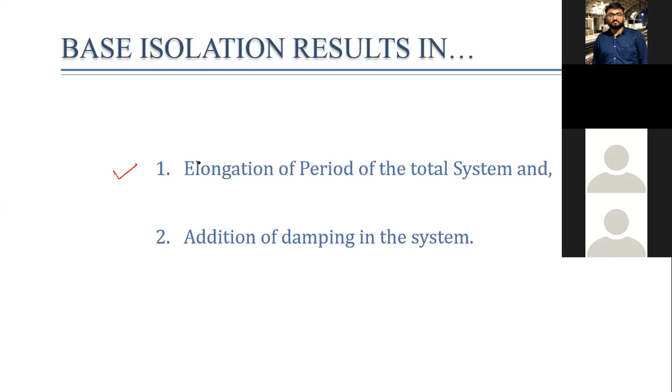Secondly, it adds damping in the system, because the isolation system consists of either natural rubber, which has inherent damping, or sliding surfaces. This damping is added in the system, which dissipates the seismic energy. Similarly, in friction type isolators, some amount of energy is dissipated due to friction. As a result, the total energy transferred to the superstructure reduces drastically. So base isolation also results in addition of damping in the system.

Now let us understand each aspect. First, period elongation.

Here we have shown one IS 1893 response spectra with which we are all familiar. SA by G is plotted on the y-axis and time period is plotted on the x-axis, and the response spectra is presented for three different types of soil: medium soil, soft soil, and hard soil.

Now suppose we have one superstructure, a single storied, fixed base building. Let us assume that the fundamental period of this fixed base building TB is equal to 0.5 second. So that 0.5 time period is shown here, and corresponding to this time period, the SA by G value comes to 2.5, 2.5 times the gravitational acceleration.

Now suppose if the same system is mounted on base isolation, like this, with these base isolators, then because of the flexibility of the isolation system, we know the time period will increase. Suppose the increase in time period is, let us say, 3.5 second. So here I am taking isolation period equal to 3.5 second.

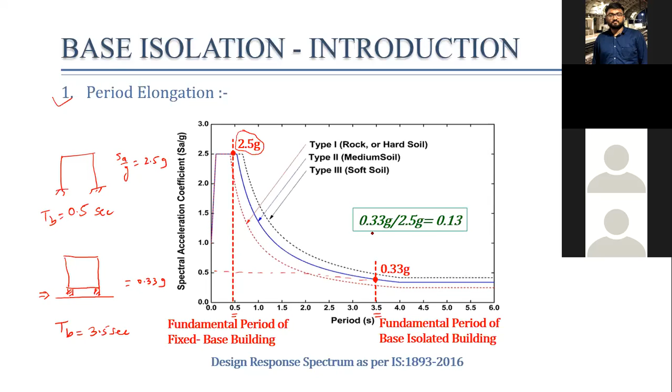So here we can clearly see that upon lengthening the time period, the spectral acceleration SA by G value has decreased drastically. In the first case, SA by G was equal to 2.5 G, and for the base isolated building that reduces to 0.33 G. Just for interest, let us take the ratio: 0.33 divided by 2.5 gives 0.13.

This means if the fixed base building is subject to, for example, 100 kilonewton total force, then the same building when mounted on base isolation will be subject to about 13 kilonewton force. So we can say that nearly 90% reduction can be achieved with the help of base isolation. This is the concept of base isolation, especially with respect to period elongation.

There are basically two aspects: one is period elongation, and the second is addition of damping. We have seen period elongation. Now let us see how addition of damping in this system works.

For that, we have plotted the response spectra for different values of damping. In IS 1893, it is given for 5%, and a table for damping coefficient is given, and using that table we have plotted this response spectra. Here we can see that as the value of damping increases from 5%, 10%, 20%, 30%, the spectral acceleration reduces.

So when the isolation system is provided, it has its inherent damping, and due to that damping, the spectral acceleration reduces. When the spectral acceleration reduces, the total base shear reduces, because we know the formula VB is equal to Z by 2, I by R, multiplied by SA by G.

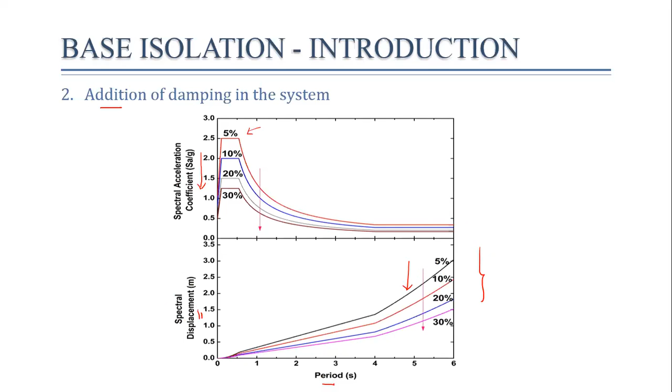Addition of damping also reduces the spectral acceleration, whereas in the next plot, spectral displacement versus period is plotted, with different amounts of damping shown. Here we can see that as the value of damping increases, the spectral displacement also decreases. So the introduction of base isolation reduces the lateral forces in two ways: one by increasing the time period, and the other by adding damping in the system.

Then the next point is effect of base isolation. So base isolation reduces the floor acceleration. Why does it reduce floor acceleration? We just see that SA by G value decreases because of increase in damping as well as increase in time period, and reduced floor acceleration induces reduced amount of interstory drift.

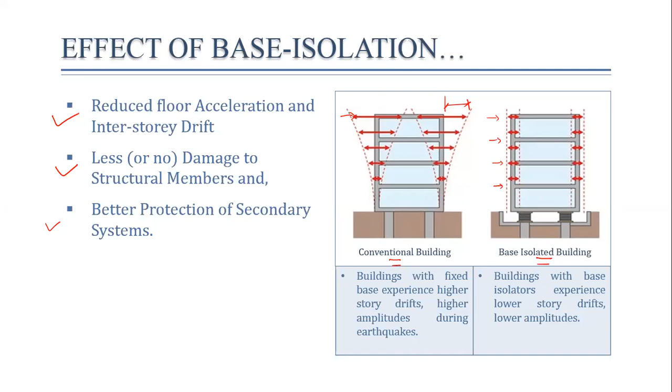Now, advantages of base isolation. Base isolation makes building more functional at design basis level. We know there are three levels of earthquake: service level earthquake, design basis earthquake, and maximum considered earthquake. So it makes building more functional at design base earthquake level and less damageable at maximum considered earthquake level. It has 2% probability of occurrence, and DBE has 10% probability of occurrence.

Then from safety point of view, the building becomes more robust against earthquakes. And the third advantage is base isolation is the most reliable and widely adopted concept among all other passive devices. So these are the few advantages of base isolation.

Now, having introduced the concept of base isolation, effect of base isolation, and advantages of base isolation, we'll move to the types of base isolation systems. Because till date, so many isolation systems have been developed. Some of them have got place in actual practice, and still some of the isolation systems remain in literature. So here I have tried to collect all types of isolation systems developed till date and tried to group them into three different categories.

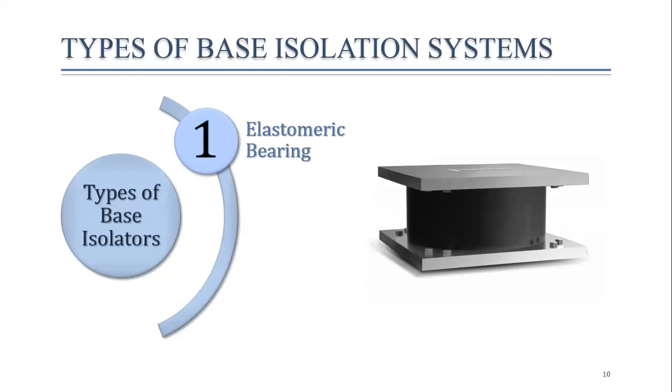Types of base isolation: we have three types of base isolation system, or we can categorize the entire isolation devices into three groups. One is elastomeric bearing, that means the bearing which consists of alternating layers of steel and rubber. This is one class of base isolation system.

Second class, rolling bearing, means the rolling balls are sandwiched between two plates, and the entire superstructure is supported on this device. This is called rolling bearing. And the third, most advanced type system is sliding bearing, that works on the principle of sliding. There is one slider that slides on a sliding surface having extremely low value of friction coefficient. So these are the three major groups of types of base isolation system.

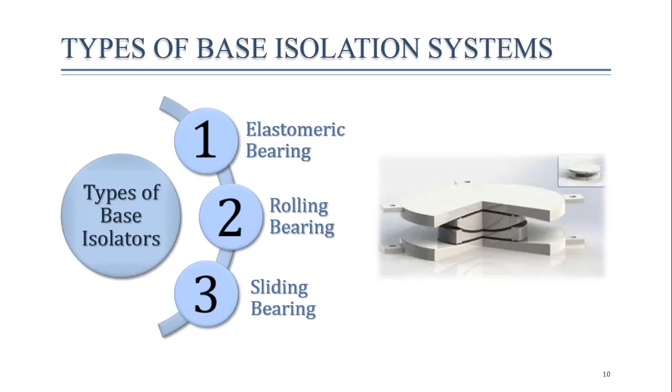So we'll see each group one by one quickly. The first type, elastomeric bearing. This can be further divided into two types: steel reinforced isolators and fiber reinforced isolators. In steel reinforced isolator, there are alternative layers of steel and rubber. So we have a type of system called laminated rubber bearing. It has one layer of rubber, then other layer is steel, again rubber, steel. This sort of construction is that.

We will see the cross section of the laminated rubber bearing in the next slide. Then another popular device is lead rubber bearing, called LRB system. It is also known as NZ system because it was developed by New Zealand. Then the third type is high damping rubber bearings. So these three devices can be grouped as steel reinforced isolators.

Then another cheap version has been developed called fiber reinforced isolator. As the name suggests, there are fibers reinforced inside the rubber, and based upon their shape, we have two types: rectangular system and circular system. So this is regarding elastomeric bearing.

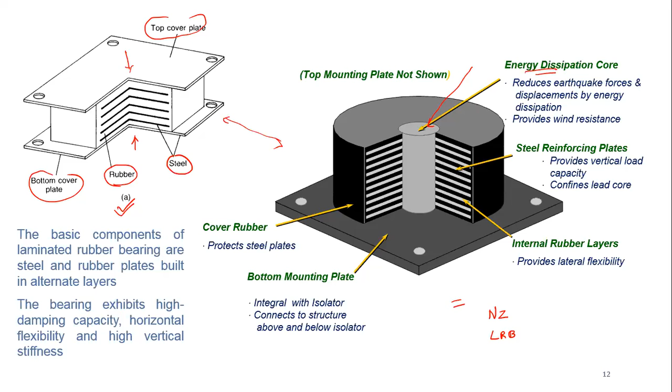Another type of bearing is called rolling bearing. We have plenty of rolling bearings available, such as the double concave rolling ball bearing. The figure is there in the next slide.

Then there can be circular or elliptical rolling rods, ball systems with restoring property, mushroom type or mushroom shaped basement, base isolation with spring and cam system, sloped rolling type bearing, ball in cone bearing, eccentric rolling isolation system, non-concentric rolling isolation system, rolling ball isolation system, and the last one is free circular rolling rods.

Among these rolling bearings, very few have found a place in actual practice, whereas the remaining isolation systems still remain in literature.

As mentioned, balls are put inside two concave spaces between structure and foundation, and the obvious defect in this technique is that high stresses are produced in the contact area. We can say this is one of the drawbacks of the rolling type system.

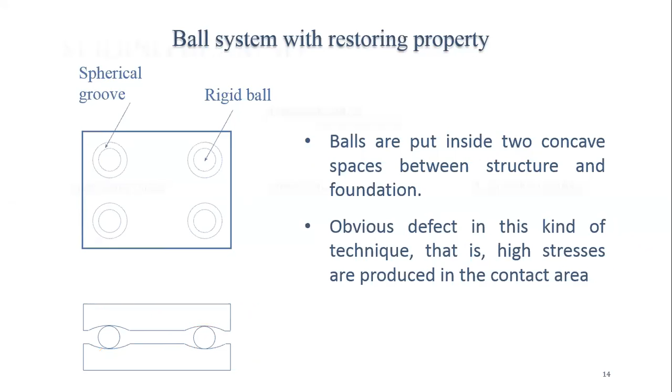The third group is sliding bearing, considered to be an advanced isolation system that works on the principle of sliding. Sliding bearings are divided into three groups: single sliding surface, double sliding surface, and multiple sliding surface. Single sliding surface, as the name suggests, has only one sliding surface on which the slider slides.

The example of single sliding surface is the friction pendulum system. Many of us know about this friction pendulum system, and also the variable frequency isolator. In the friction pendulum system, the time period is constant, whereas in the variable frequency isolator, the construction is similar but the time period of the isolation system changes with isolator displacement because of its particular geometry.

Then we have another type called the variable curvature friction pendulum system, similar to the variable frequency isolator, except the sliding geometry is different. Then there's the sliding concave foundation, and the double wedge base isolation device. It has a double wedge, but only one sliding surface, so it is placed in the single sliding surface category.

Then the polynomial friction pendulum isolator, similar to the friction pendulum isolation system, but here the sliding geometry is defined by a polynomial mathematical function. Then the variable friction pendulum system, again similar to the friction pendulum system, but the coefficient of friction varies along the sliding surface of the isolation system.

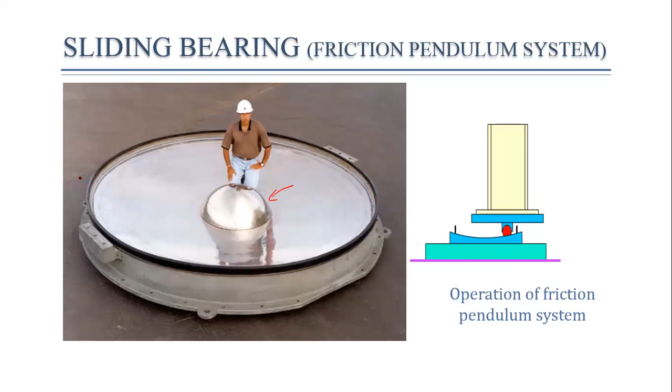This portion is called the slider. The slider slides on the surface, and the concave surface provides restoring force to the system. On the right hand side, we can see the operation of friction pendulum system. So these are the few pictorial views of sliding type bearing.

On the left side, we can see resilient friction based isolation system, called RFBI, resilient friction based isolation system. RFBI system is basically a combination of NZ type system and friction pendulum system, so it gives advantages of both NZ and FPS. NZ system is a rubber type bearing and FPS is a sliding type bearing, so we can achieve advantages of rubber bearing as well as sliding bearing in a single device, that is called

resilient friction based isolation. The internal construction is similar to NZ type system. There is one central core, and these are the plate sliding rings. Then peripheral rubber cores are provided, and two plates are there at the top and bottom, so that exhibits internal friction.

So we have friction. This rubber provides damping, and the central core also adds damping to the system, so this is called friction based isolator. It consists of a set of flat rings which can slide on each other with central rubber core and peripheral rubber cores. It combines the beneficial effects of friction damping with that of resiliency of rubber. So this is one of the systems, RFBI system.

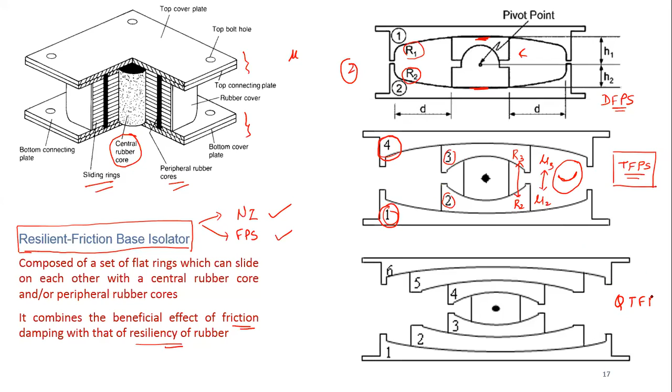Similarly, QTFP, quintuple friction pendulum system, is the latest advancement in sliding base isolation system, where there are six surfaces: 1, 2, 3, 4, 5, and 6. It is an improved version of triple friction pendulum system, and this can be modeled using five surfaces. Therefore it is called quintuple friction pendulum system. QT stands for quintuple, and this is friction pendulum system. So this is all about the sliding type bearing.

Now it is essential to understand the dynamics of base isolated building. And here we have taken minimal mathematical formulation so that we can understand easily the dynamics of base isolated building.

Hello, sir. Your voice is low. Am I audible? Yes sir, now we are. It is audible, sir. Okay, okay.

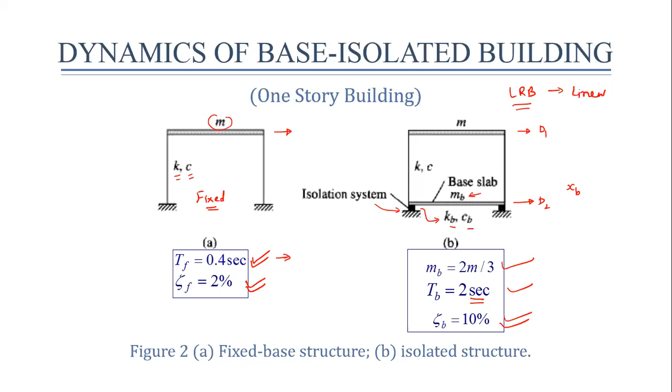Now let us move to total isolator stiffness. It's a very simple formula: K is equal to m omega square, where m is the total mass of the base isolated system and omega equal to 2 pi upon Tb. We substitute Mb equal to 2m/3, and isolation period Tb taken as 2 seconds. Upon simplification, we get 16.45 multiplied by m.

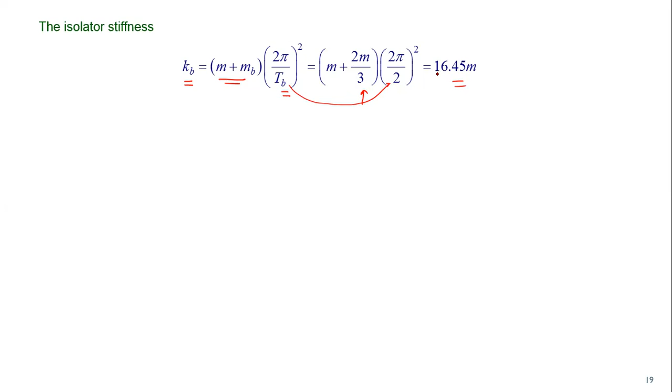This is the isolator stiffness, calculated in terms of floor mass. Then we have the stiffness of the one-story building, the fixed base stiffness, using the same equation K equal to m into omega square, but for fixed base. The first one is for base isolated building. We got stiffness equal to 246. These two numbers say many things: since the isolator is a flexible layer, it has low stiffness compared to the superstructure - 246 versus 16.45.

Then damping constant of fixed base building: we know C is equal to 2 xi m omega, which comes out to be 0.628 m. The damping constant of the base isolated building uses the same formula, C equal to 2 xi m into omega, where xi is zeta b, m is mb plus m total mass, and this is omega b. This gives damping equal to 1.047. You can compare these two values.

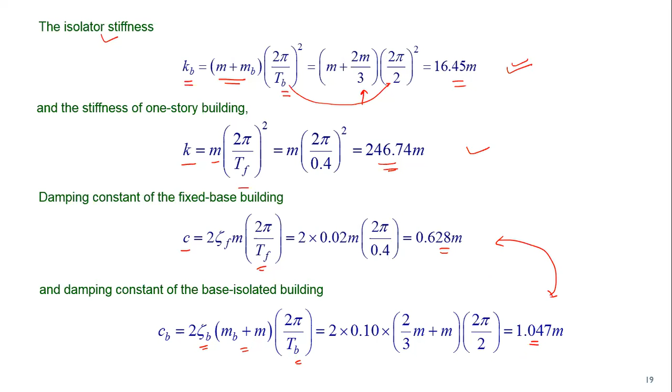So we have calculated the isolator stiffness, isolation damping, and similarly superstructure stiffness and superstructure damping. Now we'll perform the response spectrum analysis of base isolated building using the RSA method.

The first step is to construct the mass matrix, stiffness matrix and damping matrix. Since the degrees of freedom of base isolated building is 2 for this example, the sizes of mass, stiffness and damping matrix would be 2 by 2, even though it is a single storied building.

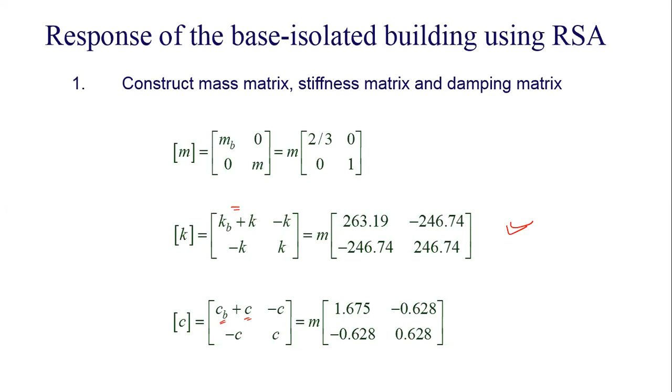So let's discuss this. The first mode natural frequency is 3.104, and this is 25.1374 radian per second. This number gives you insightful result. The first mode period is 2.024 second and the second mode period is 0.25 second.

Here we can observe that the first mode period of the base isolated structure is nearly equal to the isolation period of the system. You remember the isolation period of the system was 2 seconds, TB is equal to 2 seconds. After carrying out the eigenvalue analysis, putting the values of mass and stiffness, we got the first mode time period as 2.02, which is same as the isolation period of the system. So we can say that the first mode is essentially the isolation mode. That we will see in the next figure.

And these are the mode shapes. This is the first mode shape and this is the second mode shape, shown here clearly. So in the first mode shape, you can see this value is 1 and this value is 1.041. So we have plotted 1 and 1.041.

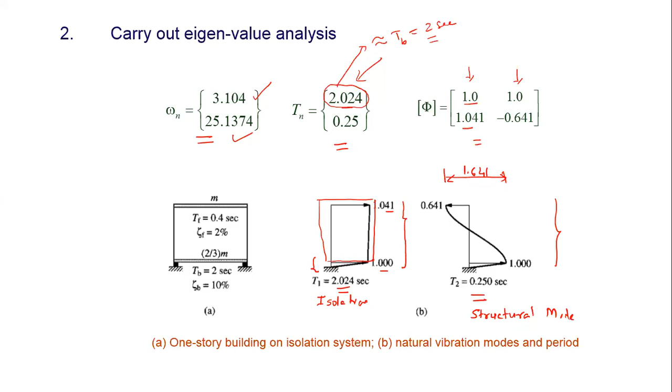So this is regarding the interpretation of eigenvalue analysis. Second step is over. In the third step, we need to calculate generalized mass, generalized damping, and modal participation factor, as we do in normal response spectrum analysis. Generalized mass is calculated using this formula: phi transpose M into phi.

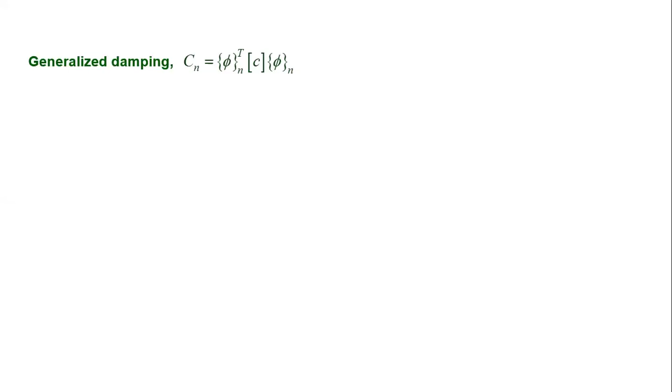Now the most important thing is modal damping ratio. We know this equation for modal damping ratio, because C is equal to 2 xi m into omega. That equation is written. So let us examine the modal damping ratios for this case. Zeta 1 is equal to 9.64 percentage. Here, one represents the first mode - modal damping ratio in the first mode.

We know the first mode is the isolation mode, and in the isolation mode, the displacement is concentrated at the level of the isolation bearing. So the first mode damping ratio is again same as the 10% damping of the isolation system. Obviously this should be same - 9.64 is approximately equal to 10%. This also implies that the first mode is for displacement at the isolation level only.

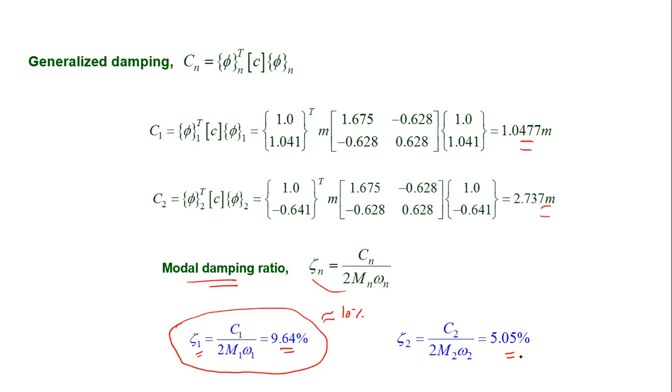Whereas in the second mode, it is structural mode, we got 5% damping. So in this way, the generalized damping is calculated.

Then modal participation factor - just using the formula, we can arrive at the modal participation factor. The relative value of modal participation factor says many things. You can see the contribution of the first mode is around 0.976, we can say 97%, and that of the higher mode is just 2.38%.

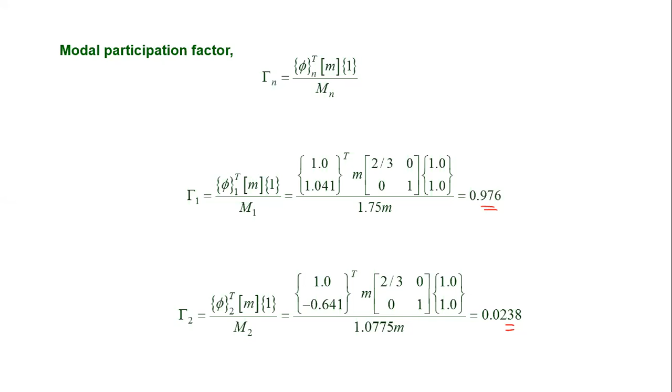Then what do we do? We use the design spectrum. In the design spectrum, we have shown only two spectrums - one is for 5% and the other is for 10%. Why 5 and 10%? Because zeta 2 was nearly equal to 5%, and zeta 1, the first mode damping, was nearly 10%. So we have selected two graphs, 5% and 10%. Note that it is independent of the damping of the superstructure, which was considered as 2%.

Now, the first mode period after doing eigenvalue analysis is coming 2.024 second, and the corresponding value is 0.538 G. Note that we have used the second curve, which is for 10% damping.

And T1 is the first mode time period, which is equal to the isolation period, right? And for superstructure, T2 is 0.25, and SA by G value is equal to 2.5 times G.

Note that here we have selected the 5% damping curve because second modal damping is 5% and the first modal damping is 10%.

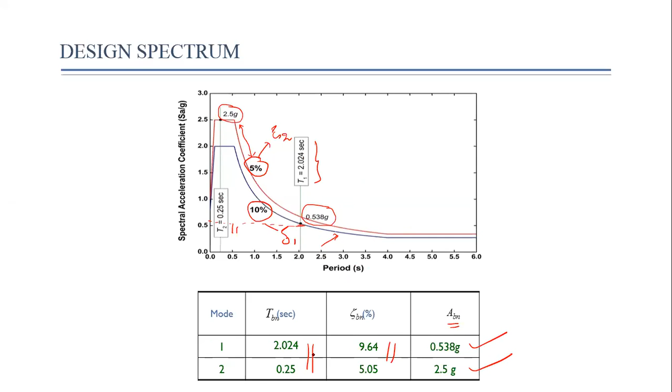Using this, we can calculate the value of spectral acceleration. We can see this value, and this is 2.5, it is okay. So these two values are mentioned here: it is 0.538 G, and for second mode it is 2.5 G. These are the zeta value and these are the time period value obtained from eigenvalue analysis. Now this spectral value will be used for further calculation.

Equivalent nodal static force can be calculated using this formula. We are familiar with this as it is similar to the formula given in IS code. So equivalent nodal force in first mode is this, and that in second mode is this. Again, you can see that the equivalent nodal force in first mode is relatively higher than that of second mode. That shows the contribution of first mode. The contribution of first mode is significant for base isolated building.

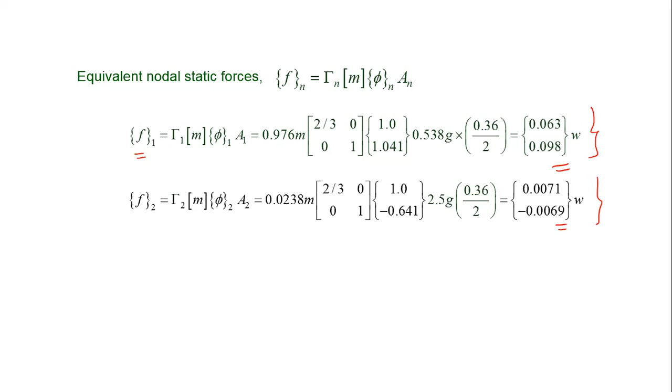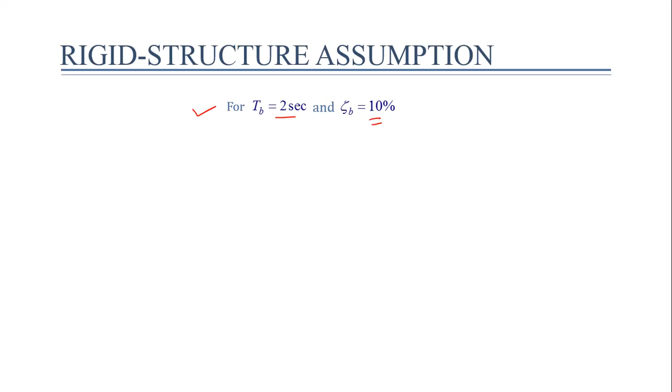Suppose the isolation period is 2 seconds and zeta b, meaning damping of isolation, is 10%. So the pseudo acceleration SA by G value is equal to 0.544, because from time period we can easily read SA by G value from the response spectrum. Then isolator displacement U can be calculated using this formula. It is a well-known formula: acceleration is equal to omega square into displacement.

So with this, we have finished the first part of our presentation, that is the concept of base isolation. Now, second part: in second part, we'll discuss the effectiveness of base isolation.

We have taken two cases to understand the effectiveness of base isolation. Base isolation is not effective in all conditions; sometimes it may be ineffective. One is the example of soft soil.

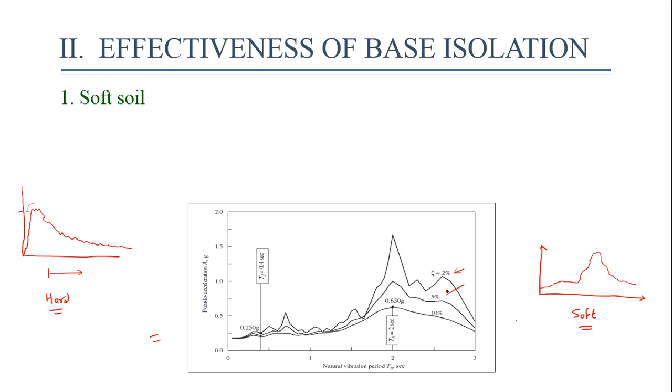So one typical response spectra is shown here, where you will see the similar pattern. Initially we have small amount of spectral acceleration, and at a large period we have higher value of spectral acceleration. It is plotted for three values of damping: 2%, 5%, and 10%.

So here we can see that the fixed base time period is 0.4 second. TF is equal to 0.4 second. What is spectral acceleration? SA by G value is equal to 0.25 G. This is for fixed base. So I will simply write spectral acceleration for fixed base building.

Now, when the same building is mounted on isolator, its time period is increased to 2.024 second. So for T is equal to 2 second, zeta b is around 10%, so we have used the third plot. SA by G value, spectral acceleration for base isolated building, has now become 0.63 G.

So here we can see the spectral acceleration has increased rather than the expected decrease in acceleration. So in this case, it is clear that base isolation is not effective; rather, base isolated structure will amplify the response. Everything is same, structural system is same, isolation system is same, but the soil condition is different. So it is due to the typical nature of response spectra measured on soft soil.

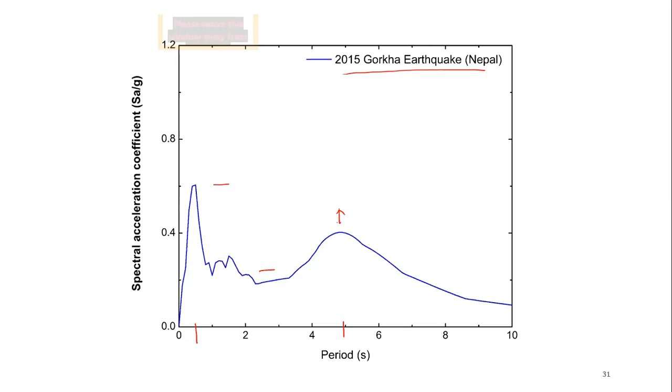Then the second case of ineffectiveness of base isolation, rather we should say flexible superstructure. For flexible superstructure, the fixed base period is now taken as 2 seconds; earlier it was 0.4 second. Now we have made the superstructure flexible. So TF is equal to 2 seconds, damping is same 2%, and base mass is again same. Isolation period is again taken as same 2 seconds.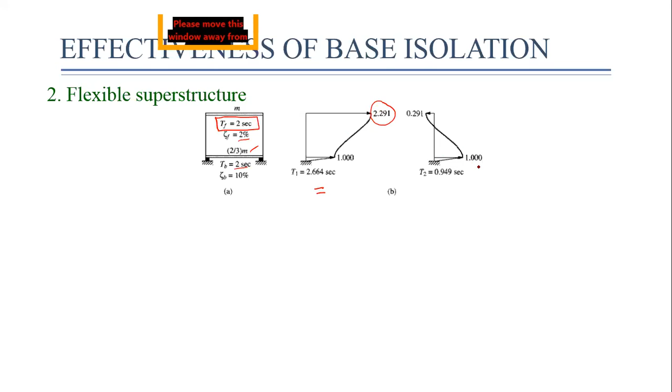The mode shapes are shown here. At the top we have displacement of the order of 2.291 second, we can say, and for the second mode we have 0.291 relative displacement. Time period and everything is shown. Now let us see what happens to this.

Fixed base time period is 2 seconds, and damping is equal to 2%. So we will follow the black color graph. For that, the spectral acceleration value is equal to 0.95 G.

Then for the first mode, 2.664, where damping is around 10%, so we will follow this blue color line. Here damping will be achieved as 13%, because of the flexibility of the isolation system, zeta 1 isolation damping in first mode would be around 13%. So we have followed this blue colored graph.

And for that you will get some value of spectral acceleration. And for the next, 0.949, here is the value of spectral acceleration, 1.07 G. So here we can see that 0.95 G was the spectral acceleration for fixed base building, and for base isolated building it has become 0.51 G. For first mode base isolated building, it has reduced to 0.51.

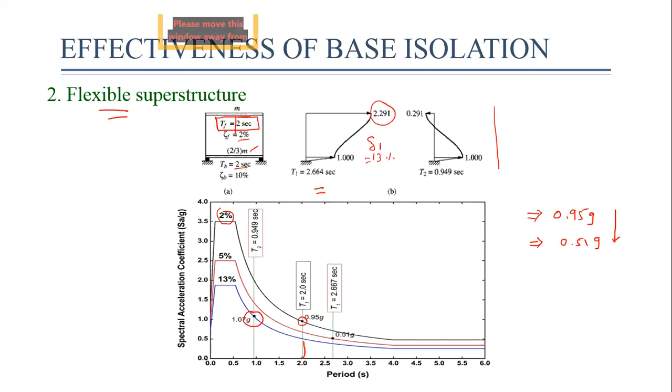Here some computation of the flexible superstructure is shown. The total base shear, SRSS base shear, of a base isolated structure is 0.1 W, and the fixed base shear is 0.171 W. Obviously there is a reduction in base shear for base isolation, but the reduction is small. It is not significant. Therefore, it is not suitable for flexible superstructure or high-rise buildings.

Then base isolation for multi-storied building. Here, a multi-storied building, say of the order of 5 to 7 stories, is shown. A similar fixed base building is placed on an isolation system. The fixed base period is 0.5 second and that of the isolation period is 2 seconds.

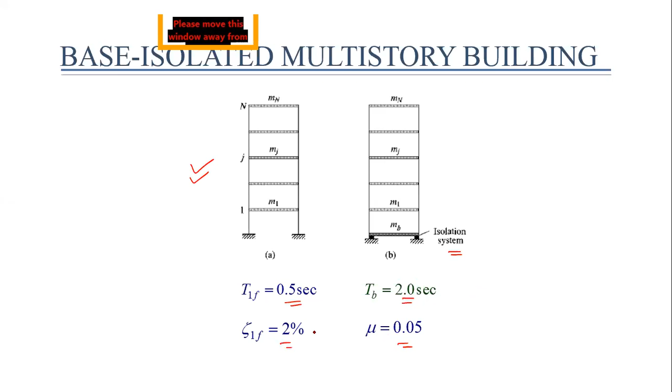Typically, we have taken a friction type isolator for this example, having coefficient of friction equal to 0.05, and superstructure damping is assumed 2%. Here, we'll just study the modal properties of the fixed base multi-storied building and the isolated multi-storied building.

So let's see the first fundamental time period of the fixed base building, that is 0.5 second, and effective modal mass is equal to around 88%. This is the first mode of the fixed base building.

Now what happens to the first mode of the base isolated building? We can see the first mode time period is 2.041, which is nearly equal to the isolation period, and the first mode mass is nearly 100%, 99.93. So only the first mode is sufficient to obtain the response, whereas the higher mode contribution is extremely small. This is the point which we need to understand for the dynamics of base isolated multi-storied buildings.

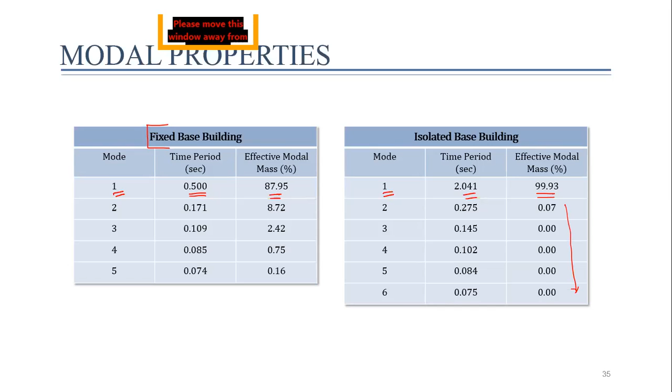Okay, then we will look at how the dynamic analysis of base isolated buildings is carried out. We will move quickly through this slide. The equation of motion is this well-known equation: m x double dot plus c x dot plus k x minus m into x double dot b plus x double dot g. We are familiar with this equation.

So the first equation is for the superstructure. Usually in the analysis of a base isolated structure, we write two equations: one equation for the superstructure, and one equation at the isolation level. So for all floors, we have one equation, it is this. And for the isolation floor, we write another equation because it is resting on the isolation system.

So we have to take into account the non-linear forces, stiffness forces, damping forces, etc. So that equation looks something like this. The nature is the same: m x double dot plus c x minus c x1 minus k x1. Fb is the isolator force. So this equation is written for the base mass.

Then for base mass force calculation, we use this equation. It is basically the equation for the lead rubber bearing. And for the friction pendulum system, we use this equation, which is the model of the lead rubber bearing. These are the three components: stiffness component, damping component, and hysteretic component, which results from yielding of the lead core. Whereas in the friction pendulum system, we have two components: stiffness component and friction component.

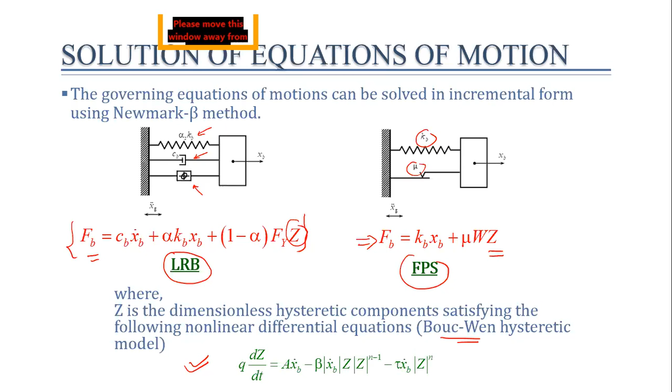Then after taking the structural configuration and structural data, isolation data, etc., here we have selected the earthquakes. Typically, spectrum compatible artificial earthquakes have been selected to obtain the response of the structure.

On top here you will see the ground motion, an artificially generated earthquake ground motion. It is generated in such a way that when we obtain the response spectra of this earthquake, it matches with the IS code response spectra for all three types of soil conditions. So this ground motion is called spectrum compatible ground motion, and it is used to obtain the response of the base isolated building.

So three quantities are plotted: top floor acceleration, isolator displacement, and base shear. Two graphs are superimposed - the green color graph shows fixed base response, and the red color graph shows base isolated response.

We can see that the top floor absolute acceleration for fixed base structure is 2.046 times gravity, and that for base isolated structure is 0.43. So a large amount of reduction in top floor absolute acceleration can be achieved using base isolation.

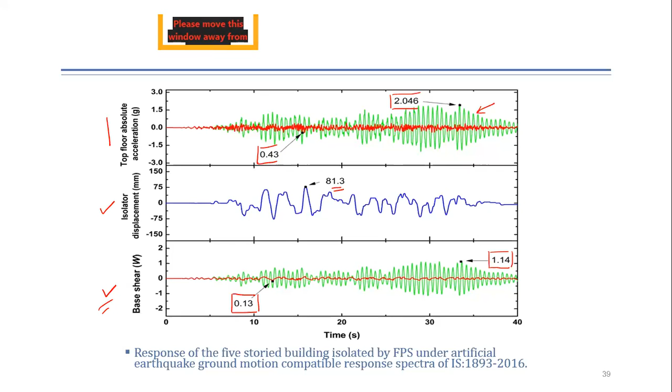So these three figures show calculated response obtained from time history analysis, considering the non-linearity of the structure. Whereas in the previous discussion, we used the response spectrum method of analysis in which we assumed the isolation system as a linear isolation system. However, here we have considered non-linearity, and for the non-linear isolation system also the results are nearly the same. This is a typical hysteresis loop of a friction pendulum system.

Hysteresis loop is nothing but the force deformation behavior, and we can see that the area enclosed by the hysteresis loop is equal to the amount of energy dissipated in friction, because area is nothing but the multiplication of force and displacement. Force into distance is equal to work, and the area under the loop represents the amount of energy dissipated through friction in each cycle of vibration.

So larger the area of the loop, larger the energy dissipation, and larger the reduction in base shear and top floor absolute acceleration.

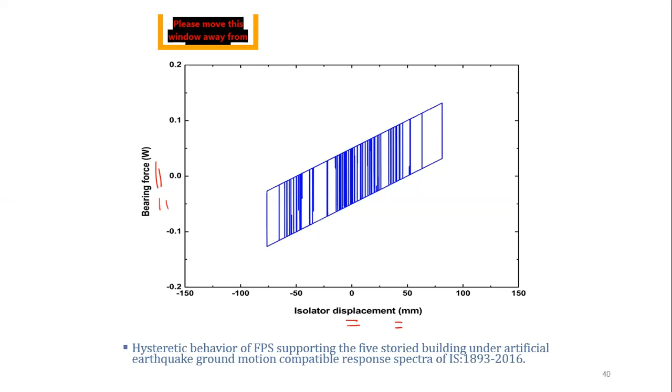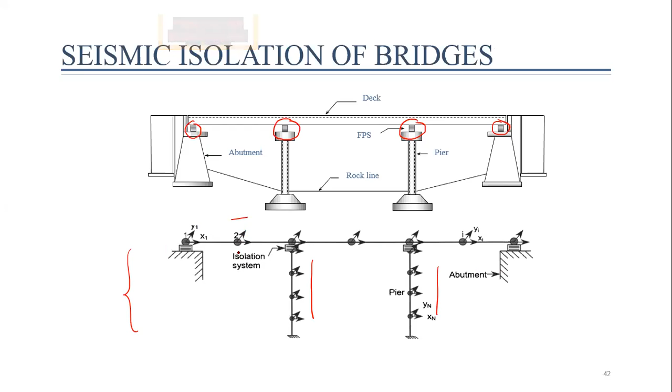Here is a typical example for earthquake ground motion. Deck acceleration has reduced to 0.085 for the base isolated bridge from 0.319 for the fixed base bridge. Similarly, a drastic reduction in pier base shear is observed - it has become 0.045 from 0.112, and the bearing displacement is equal to 54.7 millimeter.

So again, I am repeating, this reduction in base shear and deck acceleration is available at the cost of displacement at the isolation level. There is no such large displacement in a fixed base structure, especially in case of a bridge.

Now, the isolation technology can also be extended to liquid storage tank, nuclear reactor, etc. So here one example is given for isolation of liquid storage tank.

Liquid storage tank liquid can be divided into three separate masses: sloshing mass or convective mass, impulsive mass, and rigid mass. If wall flexibility is not taken into account, we split the liquid mass into two parts: sloshing mass and impulsive mass. But if we take flexibility of the tank wall into account, we can divide the liquid mass into three parts: sloshing mass, impulsive mass, and rigid mass.

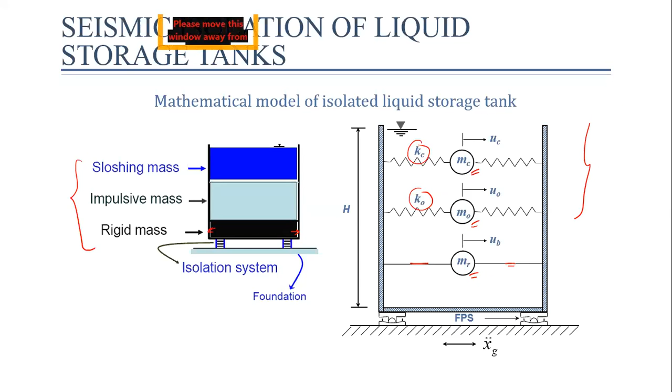But you will see there is a huge reduction in impulsive displacement and base shear. It has become 2.25 from 7.48, and base shear is reduced drastically again. So we can achieve significant reduction in base shear and impulsive displacement at the cost of increase in convective displacement.

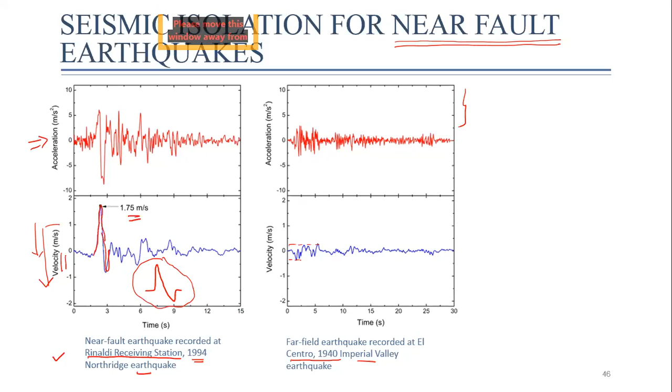As we said, near fault ground motion may have one or more velocity pulses with peak velocities of the order of 1 meter per second and duration in the range of 1 to 3 seconds. So here, suppose we have designed a base isolated system where the fixed base period is 0.4 second, and to reduce the structural response, the structure is mounted on base isolation with a time period of, let us say, 2.5 seconds.

When this base isolated building is subject to near fault ground motion, we know there is a large velocity pulse with time period of the order of 1 to 3 seconds. The isolation period is 2.5 seconds, and the period of this pulse is in a similar range. So what happens? Resonance takes place. The frequency of external excitation matches with the frequency of the superstructure, so the base isolated structure may suffer extensive damage.

For this reason, base isolation technology may be harmful when subject to near fault ground earthquakes. Of course, research is going on to improve performance of base isolated structures for near fault ground motion using semi-active control or active control, or using isolation bearings that exhibit adaptive behavior, etc.

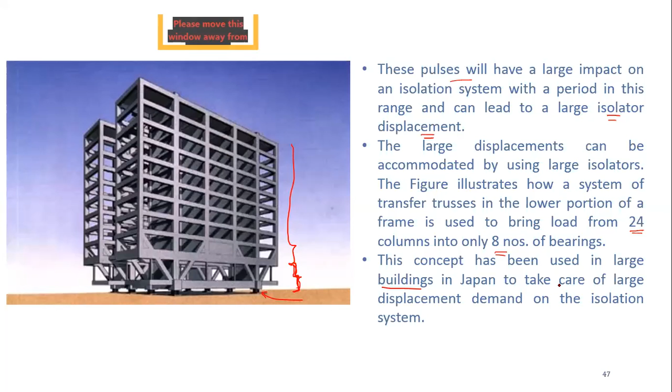This type of system, this concept, has been used in large buildings in Japan to take care of large isolator displacement demand on the isolated system.

Then another aspect for base isolated buildings is the inclusion of SSI - soil structure interaction. So how does the base isolated building respond when the flexibility of soil is taken into account? We can see the influence of soil structure interaction examined by studying the modal properties, that is mode shapes and natural frequencies of the isolated system.

Now the effect of SSI on seismic response is small when the isolators are much more flexible than the soil. In SSI, we consider the flexibility of soil. So if the flexibility of the isolator is more than the flexibility of the soil, then there is no effect of soil flexibility on the base isolated building.

However, when the flexibility of isolator and soil are close to each other or comparable, then the effect of SSI may be significant - meaning the flexibility of soil may contribute to building behavior. So if the isolators are much more flexible than the soil, the flexibility of soil has no effect on the overall seismic behavior of the structure. However, when the flexibility of isolator and soil are nearly the same, soil flexibility affects the structural behavior significantly. In those cases, we have to take into account the soil structure interaction effects.

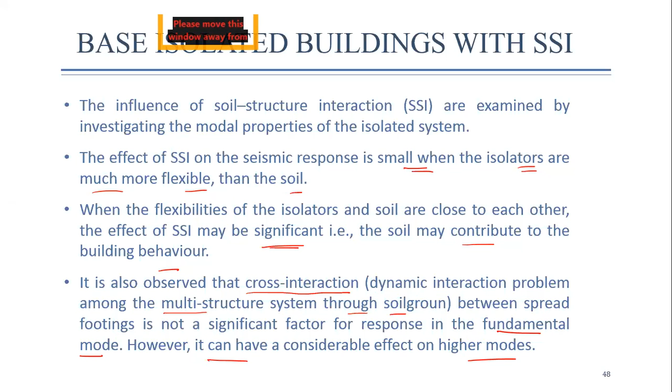Now the last point of the second part of our presentation: testing requirements of isolators. Before implementing the isolator in an actual structure, it is always tested, and these are the few requirements of testing. IBC 2000 code requires that at least two full size specimens of each type of isolator be tested.

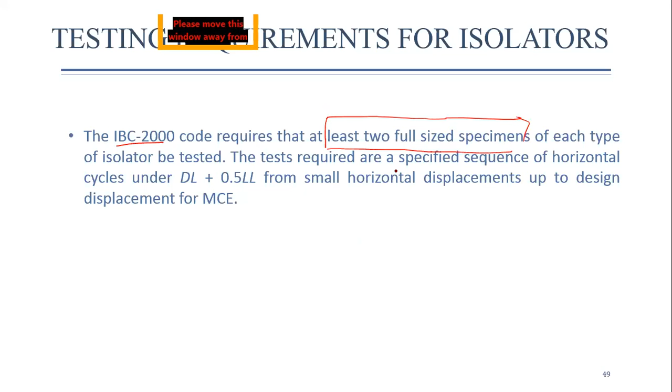The tests required are a specified sequence of horizontal cycles under particular combinations. As per IBC 2000, dead load plus 50% of the live load, from small horizontal displacement up to the design displacement for maximum considered earthquake. In addition, tests are carried out for maximum vertical load, that is 1.2 dead load plus 50% live load plus Emax. What is Emax?

Emax is the maximum downward and upward force on the isolator that can be generated during earthquake. And for minimum load, 0.8 dead load minus E minimum, which is the upward load generated due to the earthquake. So in addition to this, the testing requirement should also fulfill the second point.

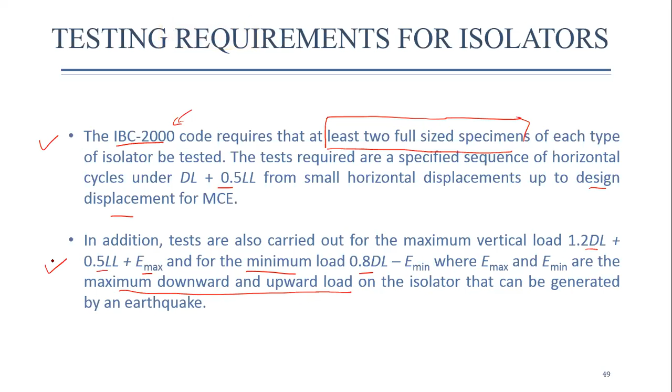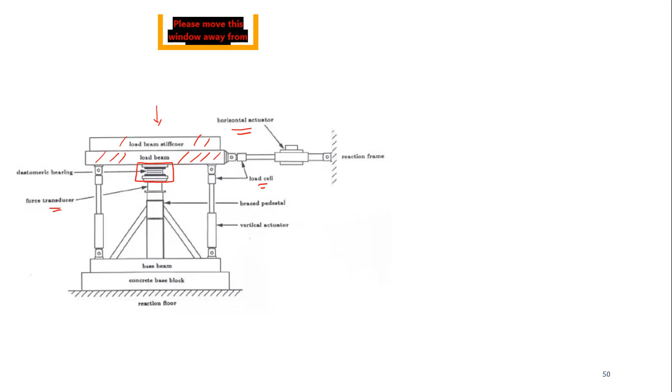With this, we have finished the second part of our discussion. Now moving to the third part: design of base isolated building. How is the base isolated building designed? Here one picture is shown. A base isolated system consists of two main components: one superstructure component and the other isolation bearing.

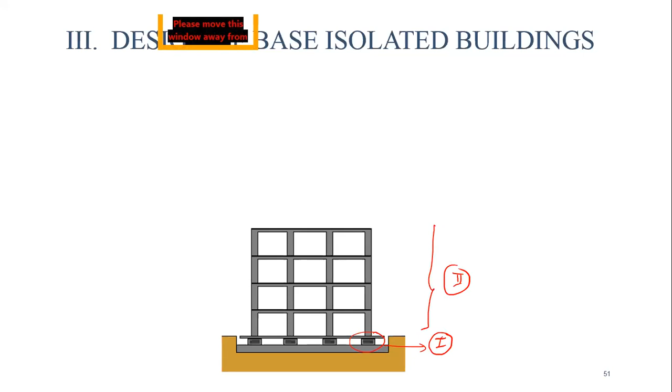So base isolated buildings are designed in two steps. In the first step, isolation bearings are designed, and in the second step, the superstructure is designed. Let us see how the design is carried out. The first step is design of isolator, and the second step is design of the base isolated building. So let us see how the isolator is designed.

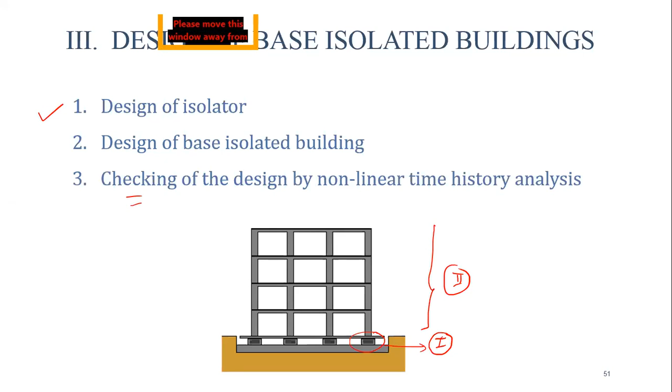Of course, after doing that design, we have to check it: checking of design by non-linear time history analysis. So the third step is just for checking, whereas the first and second steps are the design steps. Let us discuss how the isolator is designed. This is the first step, design of isolator. The objective of isolator design is to obtain equivalent stiffness and damping of the isolator.

There can be many criteria for the design of isolator; however, we have these three criteria. The objective of isolation design is to obtain effective stiffness and effective damping. We can use these three criteria. It is interesting to understand each and every criteria.

According to the first criteria, we can achieve good separation of time period between the fixed base structure and base isolated structure. Normally, the time period of the base isolated structure selected as per this criteria is around 3 to 4 times the fixed base time period. For example, suppose the fixed base time period is 0.5 second. Then how much time period should we take for the base isolated building? That is around 3 to 4 times the time period of the fixed base building.

Means if we select 3, then 3 multiplied by 0.5 is equal to 1.5. But as per UBC criteria, in no case the time period of the base isolated building be less than 2 seconds. So let's discuss the first criteria: good separation of time period.

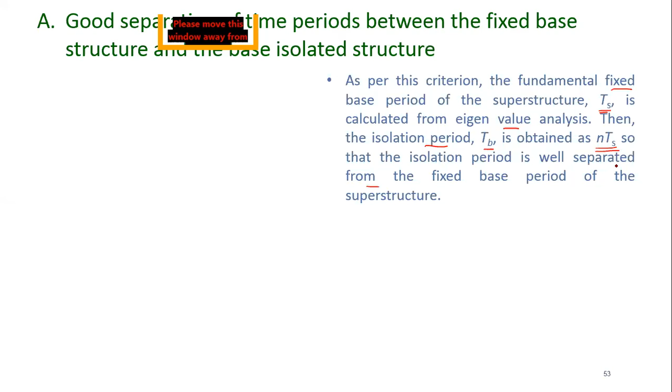As per this criteria, the fundamental fixed base time period of the superstructure is say TS, calculated from eigenvalue analysis. Then the isolation period TB is obtained as N multiplied by TS, meaning one constant multiplied by the time period of the superstructure, so that the isolation period is well separated from the fixed base period of the superstructure. Typically N is selected around 3 to 4; however, in no case should the isolation period be kept less than 2 seconds as per the UBC criteria.

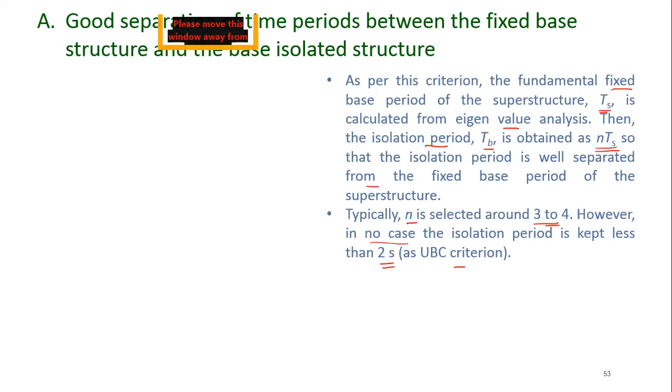So the first criteria is regarding this well separation. The building becomes flexible and spectral acceleration and base shear reduce drastically. Once the isolation period is decided, based on equivalent damping of the isolator, the spectral displacement and spectral acceleration of the isolator are obtained from the design spectrum.

The first part for determination of isolation period is over. Once you know the isolation period, we can easily calculate spectral acceleration and spectral displacement using code-based spectra. It is shown here: two spectra are plotted, spectral displacement here and spectral acceleration here. So once you know the time period, for example, if we take N equal to 3 and the superstructure time period is 1.5, then 1.5 into 3 is equal to 4.5.

Okay, so according to that, you can select—of course 4.5 is not shown here—so you can select for 4.5 value what is the spectral acceleration and what is the spectral displacement. So this is how the first criteria can be satisfied.

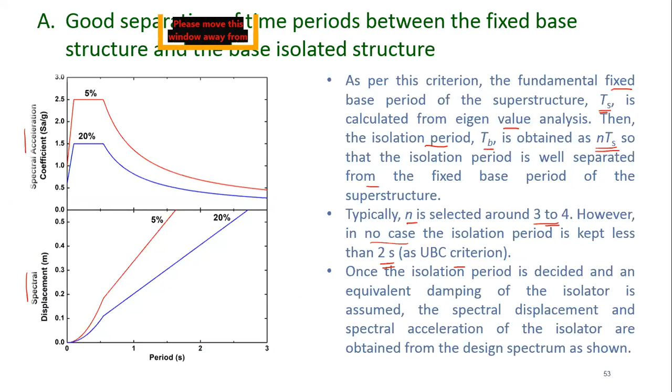Second criteria: specified maximum displacement of the isolator. In this criteria, we specify the isolator displacement, or put restriction on the maximum isolator displacement based on practical consideration, because we need to provide a gap or moat equal to the design isolator displacement. So that depends upon practical requirement. We can specify it. So for the second criterion, the permissible displacement of the isolator is specified from practical consideration.

Then isolation period and spectral acceleration are obtained from the spectrum. Here we can see this is our design displacement, specified from practical consideration. For this particular example, we have selected our design displacement as 20 centimeter. So we can draw one line corresponding to the design displacement, and the intersecting point represents the time period.

In first criteria, we fixed the time period of the isolation system, and then spectral displacement and spectral acceleration were obtained. Whereas in second criteria, we are doing something different: we are specifying the spectral displacement, and corresponding to that, we calculate the time period and spectral acceleration. This is what is mentioned here.

So once you get this time period, the line can be further extended above, like this, and we can obtain the spectral acceleration. So first we assume SD, and then we calculate TB and SA. So this is the second criteria of designing the isolation system.

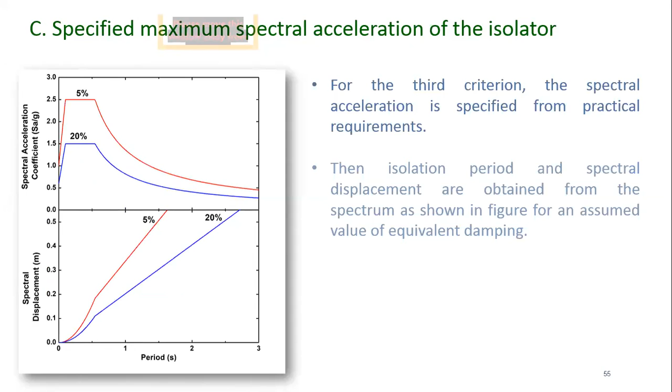Now third criteria: here we specify the maximum spectral acceleration of the isolator. So for the third criteria, the spectral acceleration is specified from practical requirements. Then the isolation period and the spectral displacements are obtained from the spectrum, as shown in figure, for an assumed value of equivalent damping.

Now this is very important. The third criteria is generally required for buildings containing sensitive equipment. For sensitive equipment and machines, one should restrict the spectral acceleration, which requires stringent control on the floor acceleration. Acceleration control may also be required for human comfort. So when the building is hosting sensitive equipments and machines, we have to follow this third criteria: specified maximum spectral acceleration.

According to this criteria, we specify SA, and from SA we calculate TB and SD. So here we can see the specified acceleration is, suppose, this much. Then we extend this line—this is the isolation period—and it intersects with the spectral displacement graph over here. So the corresponding value for that is this. This is our SD.

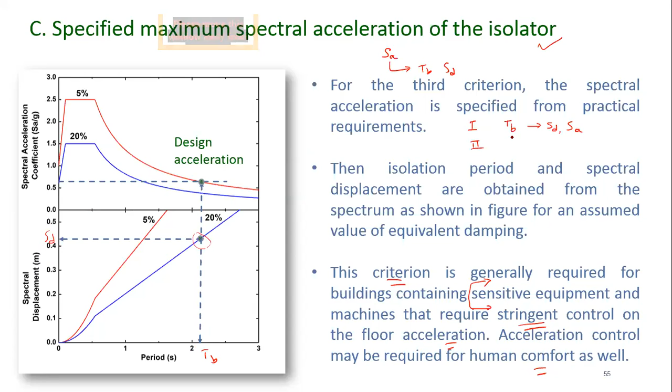So let me summarize quickly. In first criteria, what do we do? We first take TB, and then SD and SA are obtained. In second criteria, we specify SD, and from SD we obtain TB and SA. Whereas in third criteria, we specify SA, and then we calculate TB and SD. So that depends upon the requirement.

So this is how the isolation system is designed. So the first part is over—isolation system design is over. We will take one numerical example and see how exactly the isolation system is designed in the next slide.

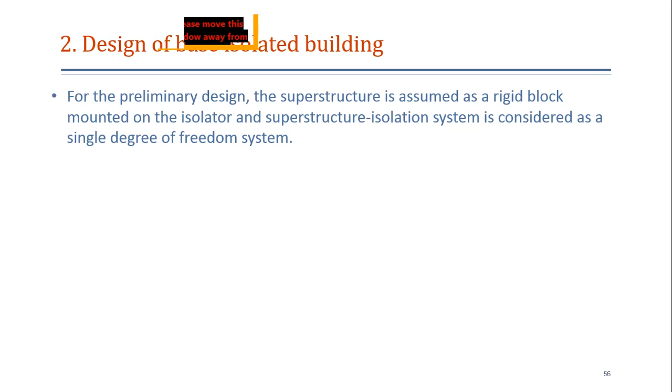Now the second part is regarding the design of base isolated building. For the preliminary design, the superstructure is assumed as a rigid block mounted on the isolator, and the superstructure-isolation system is considered as a single degree of freedom system. Then the cross section of superstructure members are determined by equally distributing the base shear at all floor levels, as we explained that for base isolated buildings, the superstructure behaves as a rigid body, and hence the lateral force acting on all floors is nearly the same.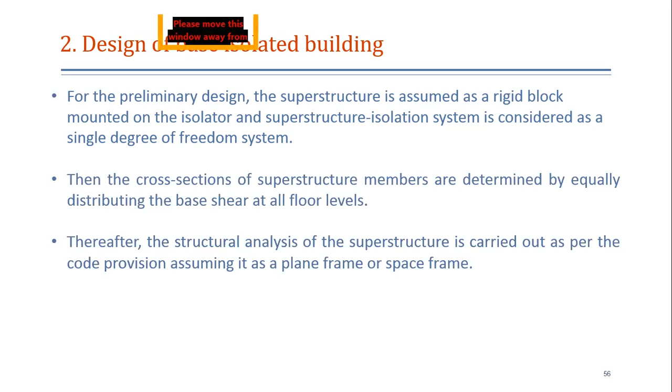Thereafter, the structural analysis of the superstructure is carried out as per code provisions, assuming it either as a plane frame or space frame. Further, the base of the frame is assumed fixed against rotation, vertical motion is restrained, and lateral displacements are controlled by lateral springs having stiffness equal to that of the isolator.

Then, after doing the preliminary design of superstructure and isolators, a response spectrum analysis is carried out to obtain a better estimate of the isolator displacement. And if the displacement obtained from response spectrum analysis is less than the displacement considering it as a rigid body, then our design is okay.

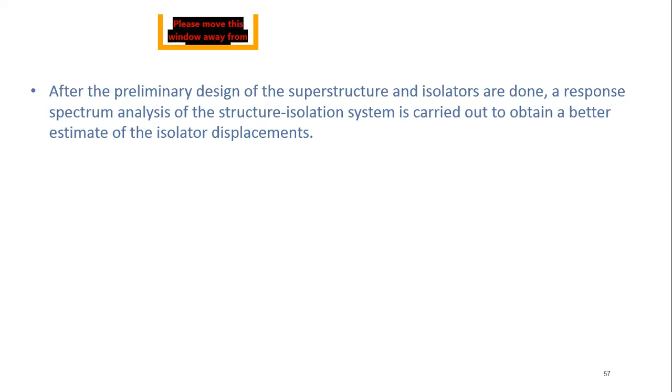Otherwise, if we get more displacement from response spectrum analysis, then we have to modify the isolator property and redesign the elements, and this step is repeated till convergence is achieved. The peak displacement of base isolators obtained from response spectrum method of analysis are compared with those obtained from the preliminary design of the isolator.

So here I am quickly summarizing the design process. First is design of isolation system, that we know. Now for superstructure, what do we do? We assume the superstructure to be rigid. This is rigid superstructure.

And we got some base shear here. We are taking the example of 1, 2, and 3 storied building. So what do we do in this case? This base shear will be equally distributed, right? So VB by 4, VB by 4 at all floor levels.

Then these forces are assumed to act on each floor. These are the lateral forces: 1, 2, 3, 4, 1, 2, 3, 4, 5. Let me cancel it and draw again: 1, 2, 3, 4. Let us assume that one intermediate column is also there.

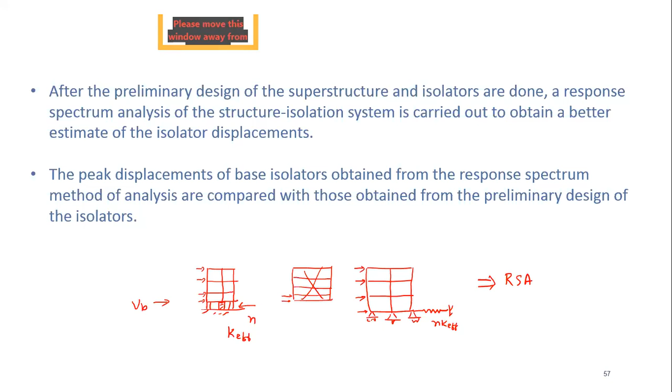Once the design is over, the designed structure is further checked by performing RSA, response spectrum analysis. The response spectrum analysis results should be conservative as compared to the preliminary design of the superstructure and isolator. If a significant difference between the two is found, the isolator characteristics are modified and the response spectrum analysis is repeated. This process is continued till convergence is achieved.

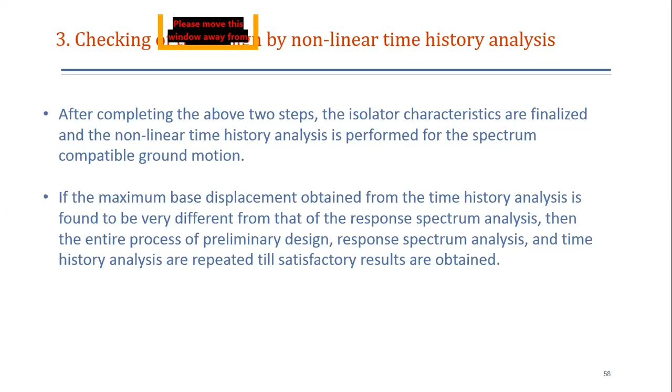Then in the last step, the results are checked by performing nonlinear analysis. Again, if there is a significant difference between the response spectrum analysis and nonlinear analysis, we have to revise the properties of isolator and superstructure, and further reanalysis is carried out till convergence is achieved. So once the design passes through nonlinear time history analysis, then it is okay.

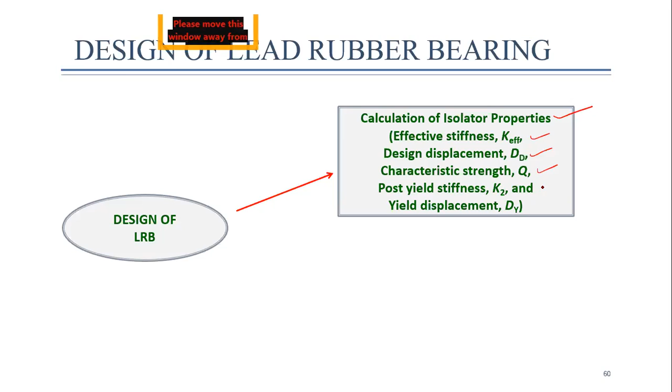So design of LRB is a two-step process. In the first step, isolator properties are calculated: effective stiffness, design displacement, characteristic strength, post yield stiffness, and yield displacements. Then in the second step, calculation of sizing of the elements of isolators is carried out - that means what will be the diameter of the bearing, the height, the diameter of the central lead core, and the thickness of rubber and steel layer. That is called geometric design. So in the first part these properties are calculated, and in the second part the geometric design is carried out.

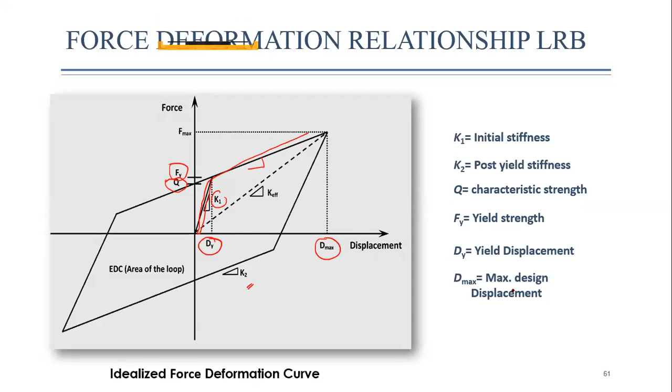So it's a typical force deformation relationship of lead rubber bearing. This particular behavior is called bilinear behavior, because it has two stiffnesses. This is called primary stiffness, and this is secondary stiffness. Secondary stiffness is K2, and primary stiffness is K1. And other parameters: Q is called characteristic strength, Fy is the yield strength, dy is the yield displacement, and dmax is the maximum displacement, or design displacement, for which the isolator is designed.

Then the isolator properties are calculated using this step. First we find the effective stiffness, then design displacement. It is spectral acceleration multiplied by zone factor, then damping modification factor, and isolation period, and I is importance factor.

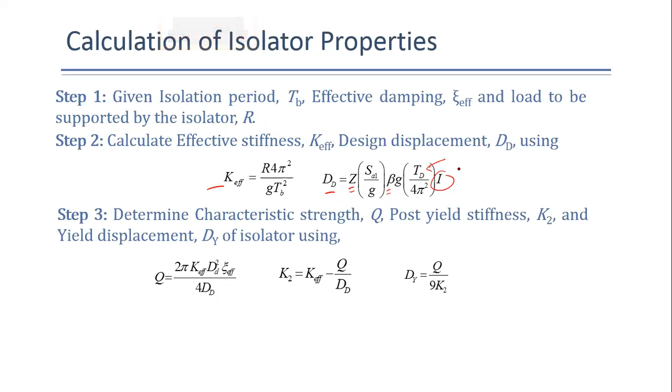Okay, we are familiar with all this terminology. Characteristic strength, secondary stiffness, and yield displacements are calculated using this formula. Finally, we can have the design.

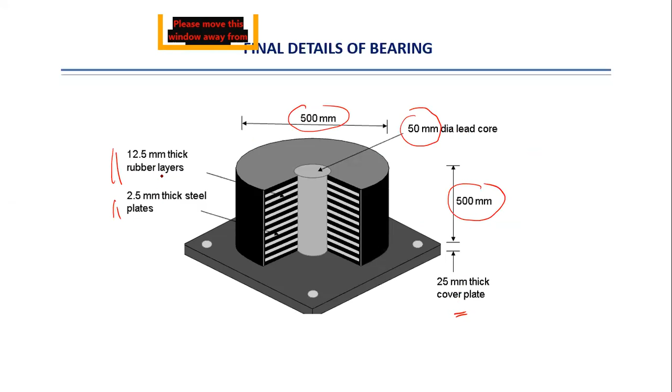This figure represents the designed lead rubber bearing for the 5-storied base isolated building shown in the previous slide. This is the exact design bearing. The diameter is 500 millimeter, and after using all mathematical equations we got this. Height of the bearing is again 500 millimeter. 25 mm thick cover plates are there. A 50 mm diameter lead core is sufficient for this design, and the thickness of the rubber layer is 12.5 millimeter, and that of the steel plate is equal to 2.5 millimeter. So this is how the bearing is designed.

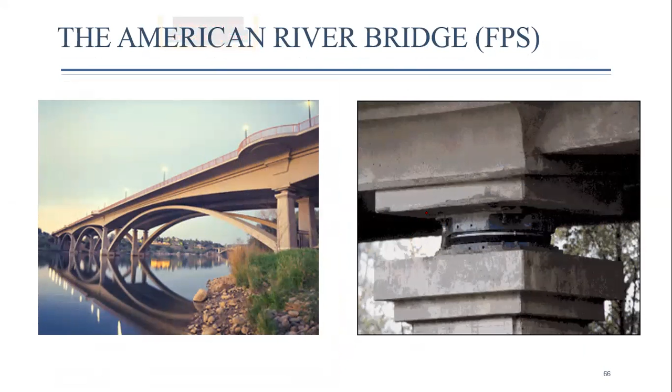This figure shows the application of base isolation in a bridge. Here, the isolation bearing is provided between the deck and the substructure.

And last, it is the San Francisco City Hall. The base isolation is used here as a retrofitting strategy. This is very interesting, we'll move quickly over this. This building was constructed in San Francisco in 1915. The fixed base period of this building is 0.9 seconds, so it is a very rigid type building.

It sustained substantial damage from the 1989 Loma Prieta earthquake, centered about 60 miles away, and the structure was damaged, necessitating repairs and strengthening. Since it's a historic type building, in order to preserve the historic fabric, base isolation was adopted to improve the seismic resistance. The superstructure was strengthened by new shear walls inside the building so that externally it appears as it was. So the existing fixed base building was retrofitted using base isolation technology.

For that, 530 lead rubber bearings were used, which resulted in an isolation period of 2.5 seconds. Note, compare it with the fixed base period. The retrofit project was completed in 1998. So base isolation is not only used for constructing new buildings, it can also be used as a retrofitting option.

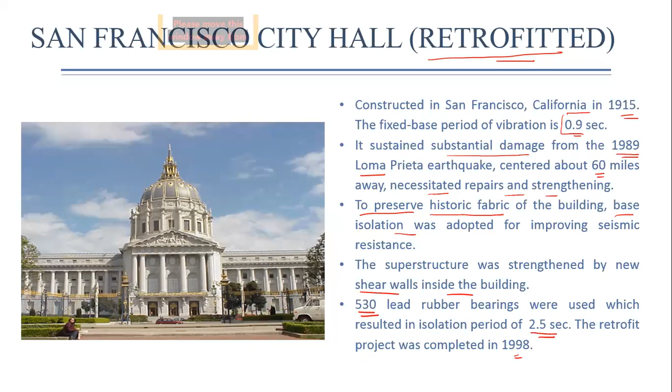In summary, the most suitable candidates for seismic base isolation are stiff structures on hard soil underneath, such as low rise and medium rise buildings, nuclear power plants, bridges, large liquid storage tanks, and many other types of equipment. High rise buildings are not suitable for base isolation due to their high fundamental period.

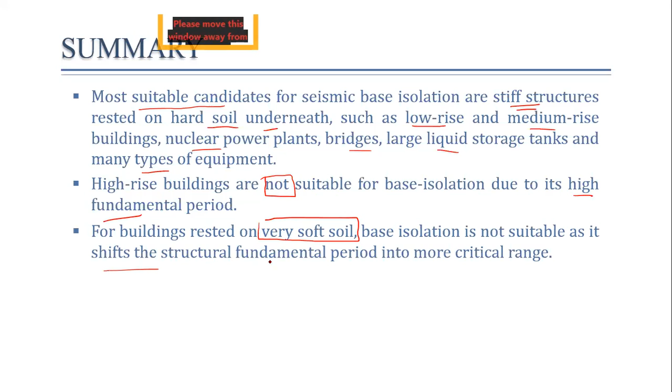For buildings resting on very soft soil, base isolation is not suitable as it shifts the structural fundamental period into a more critical range, and rather magnifies the structural response. In general, only certain types of structures are presently suited for base isolation, although technology is gradually overcoming these limitations.